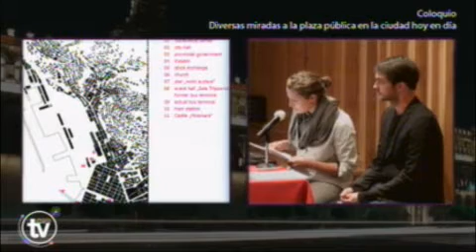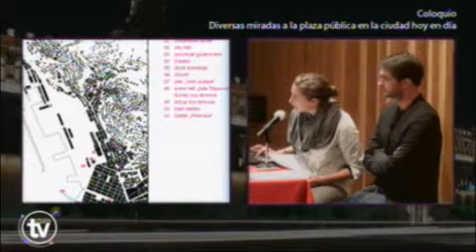Trieste has, from my point of view, really interesting different types of public spaces. For example, embedded, closed public squares within the city grid, or at points where different structures of the city meet, or a linear space along the waterfront. The public squares there are some really closed, and some connecting with the water, where you have the point of view facing the water.

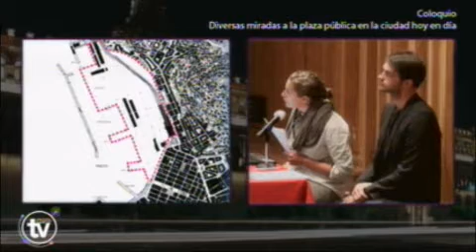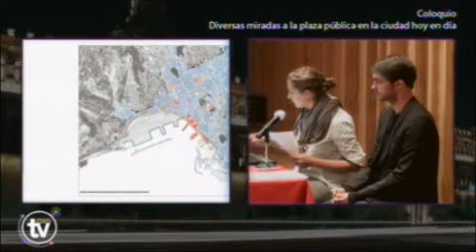So with all these points she found, she produced this master plan, which you can see the brownish line is basically the linear space she found, and she keeps... I'll try again, no.

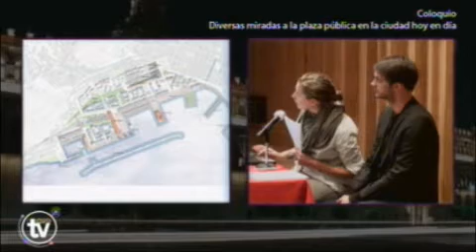Not working. So she keeps continuing.

She takes this linear space and runs it along the waterfront, placing public buildings on it, or a park, actually on the big pier, which is on the right-hand side of the site.

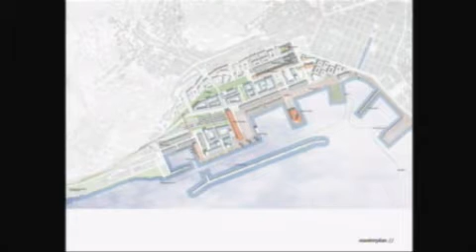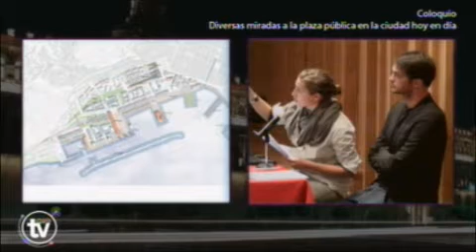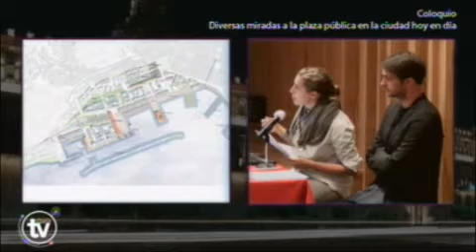What she also did is move the train station. It's not up there anymore where it used to be, but where you see this long orange stripe with the tracks coming. This move was really intelligent because she basically had three new chances. The first is that by producing a new train station in a new position, she moved it closer to the water, so she could connect in a big hub the train station, the bus station, and the ferry terminal.

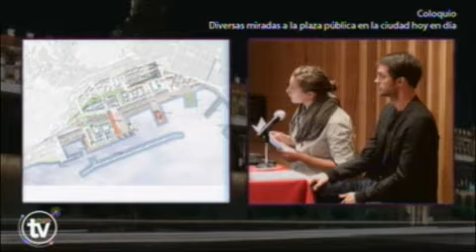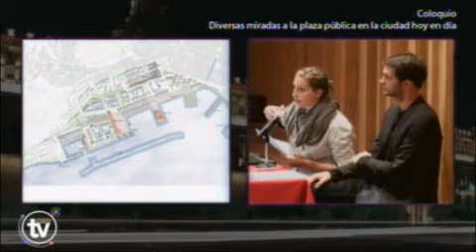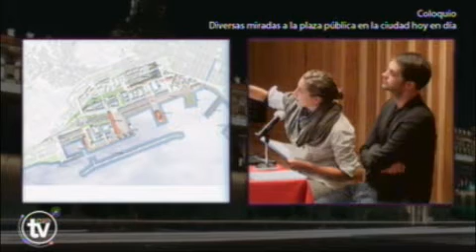By moving the train station a little bit away from the city, though still within walking distance, she automatically activates her public strip, because people still have to go to the train, bus, or ferry station, and all her public buildings along that strip get used. The third advantage is that by moving it, she removes the barrier that used to be at the north of the site, and can connect it by putting new dwellings in front of the existing buildings.

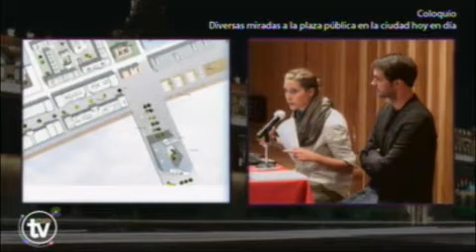I will flip this. When we look at her focus, we always ask the students to make a big master plan, and then to focus on one certain point where they have to tell somehow a story, what can happen in the city.

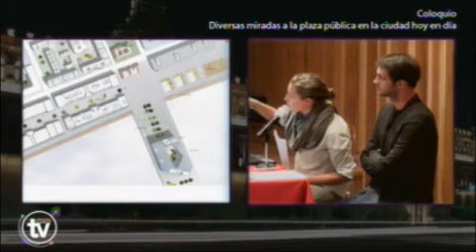The focus point is where she has one of the big public buildings, a learning center, again reminding of the story: melting pot, languages, cultural interest coming to the city. This is the big one on the pier, connecting visually to the old city and the sea, but also to the new quarter she created.

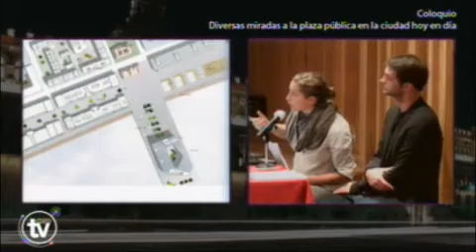As well, you can see that by drawing and showing the ground floors, the inner life of the ground floor, you can see what's happening even there. Again, it shows that the square is not only the square, but the square together with the functions you have.

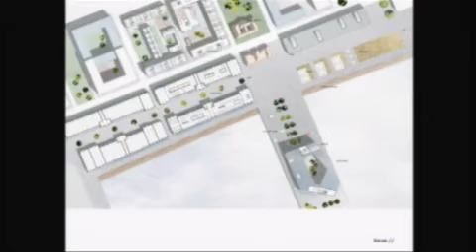Even though she has a lot of housing in this project, the ground floor always has a special function: it's public, it's office space, or shops, or a hotel. Along the water she has sports facilities, so that people of the city—not only those moving into this new quarter, but every inhabitant—can use it and take part.

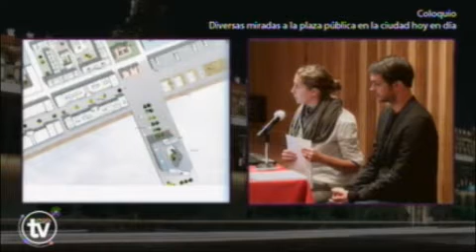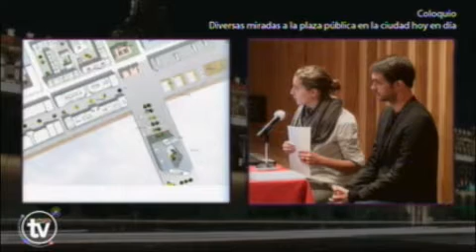So at the end, this is the image she created, where you can see the existing buildings, the magazines on the left, which are now open, so there is the possibility to enter and use it.

Then there's this linear space where there's cafes and people dancing, and then there's the steps, so you can even touch the water, which right now can't happen in the city because there's no steps going down. They have the public building, and you see the lights of the existing city.

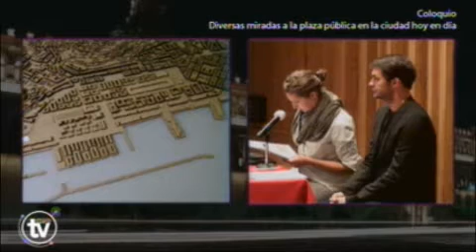She did research as well, and these are more like icons she produced for her actual design projects. On the far left icon, you can see she doesn't have a linear space like the student before. She has many smaller public squares which are always visually connected with the water and with the city on the other side, spread over the whole site. And the image next to it shows again public buildings dealing with the public space.

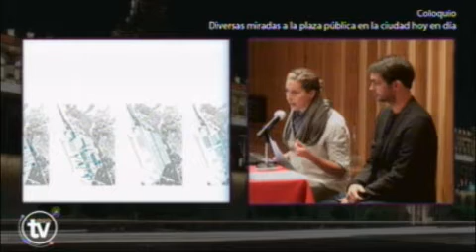The last two images just show why it's called Spine, because the dark blue line going through the site is basically the point where the spine is the big road where all the cars will pass, and it's building the spine not only in a thematic way but also in a volumetric way. The last image shows, along the spine are the big buildings, the volumetric buildings, and then they decrease in height and scale towards the city and towards the water. So you have a form like this along the spine, and the spine is where most of the life takes place.

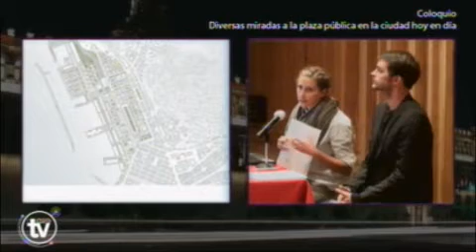So this is the master plan she produced, and here you can see the difference to the other project I showed you before. She has the public space in the site, and it deals with existing buildings and new buildings. The existing buildings are mainly the long ones that are there, and the courtyard houses in a big scale. The big blocks are the new buildings, and then you see the squares in it. So what happens? You can.

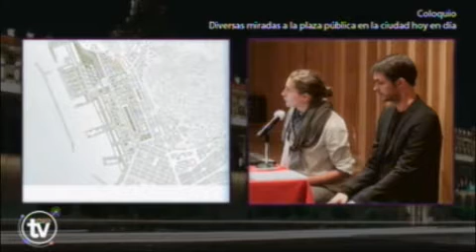So this is her final image, and here you can see it's not dealing so much with the water. It's more dealing with the history of the site, with the magazines, and there are old buildings, new buildings of different scales and different styles, and I think it makes you believe that this could work actually.

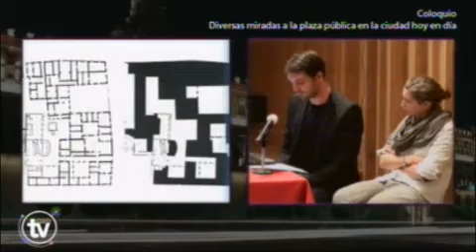As we realize that mass and void are part of the figure-ground relation, it's very interesting that these two elements relate, and we're actually interested in these voids, in that sort of spaces which are either outside or inside, and which sort of connect and interweave the structures.

Esto es bastante interesante. También fue lo mismo en la imagen anteriormente. Trata de la relación entre la masa, el volumen y el espacio abierto, y sus interrelaciones.

That's a quote of Paulo Mendes da Rocha saying there are principally no private spaces, there are just different degrees of publicness. I mean, that can be discussed.

Esto es una cita bastante interesante que puede ser discutida de Paulo Mendes da Rocha. No sé qué piensan ustedes. Él dice que predominantemente al principio no hay espacios privados, solamente hay diferentes escalas de publicidad.

And referring to the idea of Slutzky and Rowe, we really enjoyed visiting Hotel Camino Real by Legorreta, and as I said, we really enjoyed being here and seeing all the fantastic architecture your country has to offer.

Bueno, y en relación de esta relación entre masa y espacio abierto, ellos muestran que estuvieron en el Hotel Camino Real, que para ellos refiere a esta temática y es un ejemplo más de la fantástica arquitectura que existe en esta ciudad.

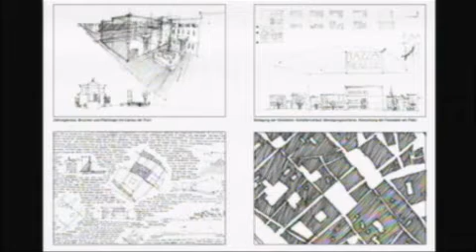And some of the students even referred to when we first started, not all of them have read the text of Slutzky and Rowe, but some apparently had, so they referred to the idea that the church is part of the square and how the urban structure of public space interweave.

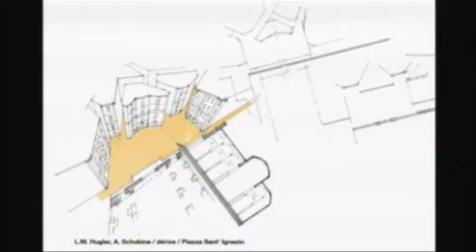Okay, so finally we're coming to the campus of Valco San Paolo, and as the last project in Europe, there's a lot of conversion and urban transformation of former industrial areas into today's urban fabric.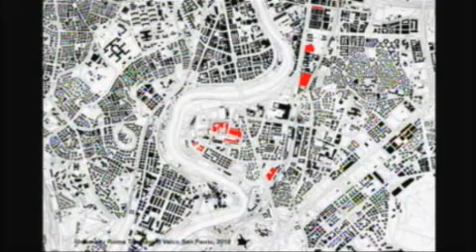That's one important thing to consider when designing for a campus. There are different types of campus: a greenfield campus and an inner city campus. We had to handle an inner city campus. The interesting thing is how the campus relates to the city, and what's the synergy between the city and the campus.

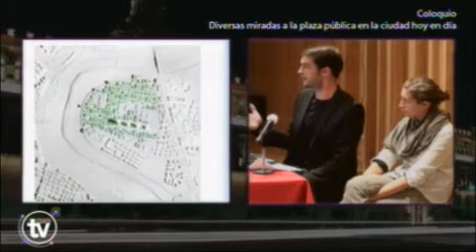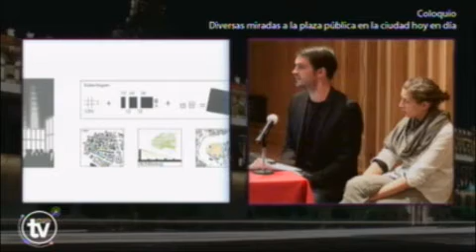So they came up with this picture of having the spine as a point of orientation, and they came up with a grid system where they based the city, which is built around the Vasca Navale. They used this axis as the base of their design and created a system of blocks, of smaller elements.

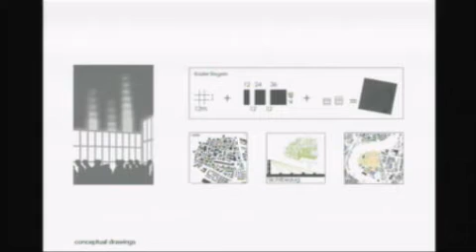Another interesting aspect of public space in their design was that they saw the street as a public space by creating a shared space, not separating street and plaza. They connected it - it's just one ground, and on that common ground there's everything: cars, people, bicycle traffic, and also plazas.

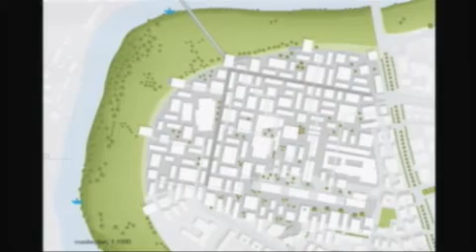They developed different typologies and also referred to the idea of transparency by having little passages through the buildings, even taking the common ground into the buildings.

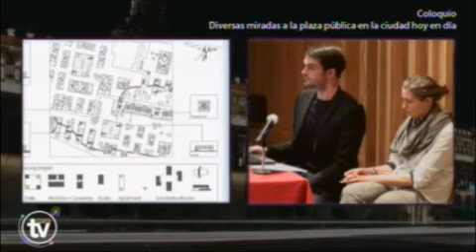And they built a model which is both geometrical, volumetrical, and a ground floor model. So you take up the volumes, and then you can see what's happening in the ground floor and how the city interconnects.

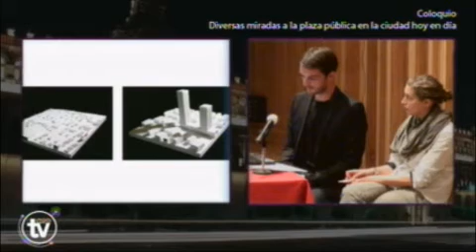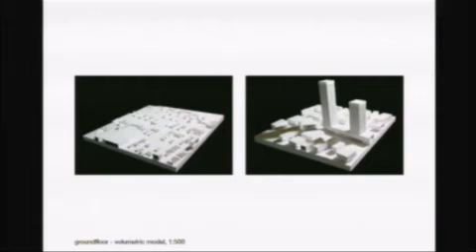The second project I want to show has a very different approach, and it's called Public Spaces in Between by Lisa Hugler and Anna Schubina.

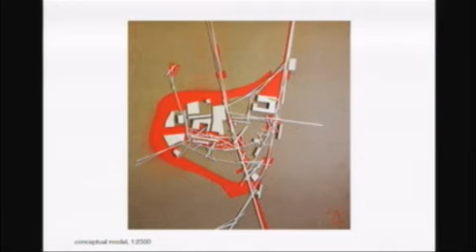So they came up with this conceptual model, and they said that the campus is dominated by big volumes. So what they said is, we're going to add more big volumes, and the important thing is the connections between the volumes, but also the connections of this agglomeration of big volumes within the city.

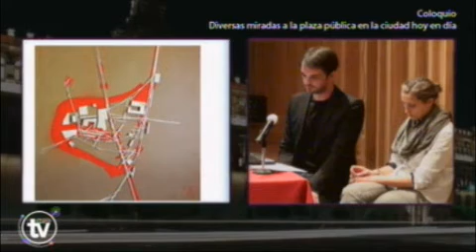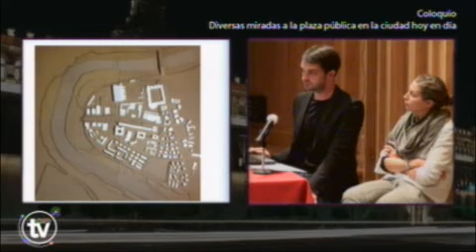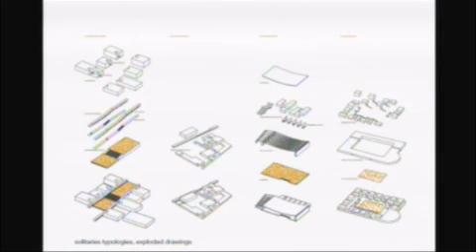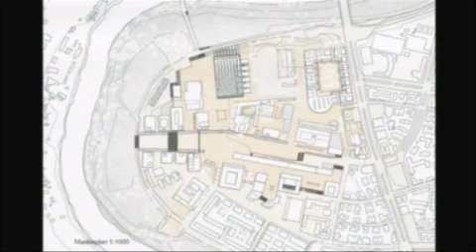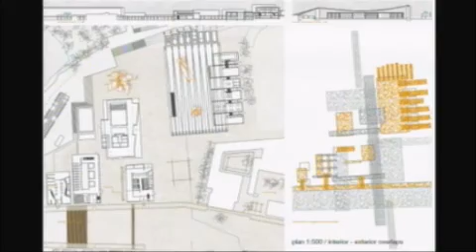And going to the focus, you can see how they try to interweave the different sorts of spaces and create a new kind of urbanity that also connects to the river with stairs. The main aspect in their design is the central staircase, which takes you through the campus, but also offers the opportunity for institutional buildings to be accessed via this central staircase aspect of the design.